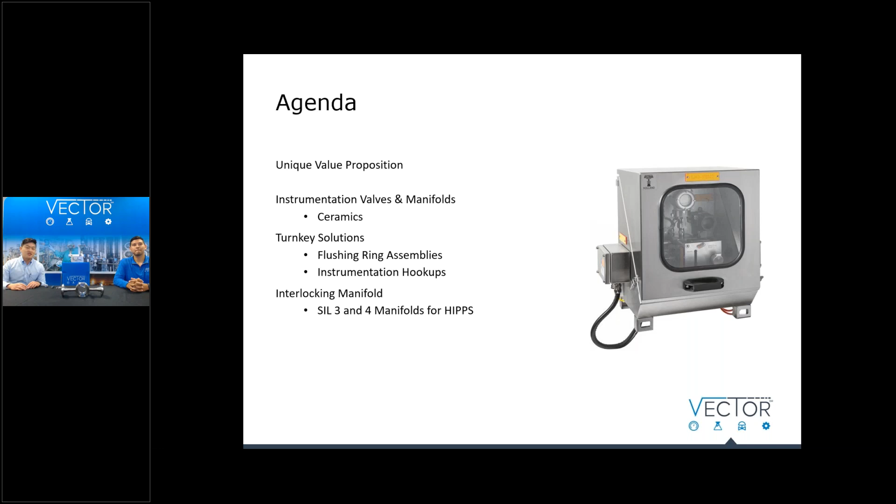We've broken it into a section talking about how instrumentation manifolds have been able to solve challenges, but also turnkey solutions with flushing ring assemblies and instrumentation hookups. And then finally, showing the interlocking manifold, something that we developed 40 years ago that has really been able to solve a challenge, particularly related to SIL-rated systems or high integrity pressure protection systems. So with that, let's get into it.

Astava, really quickly, is a company that was founded in 1956, and we're based in Meppel, Holland, about an hour and a half east of Amsterdam. The company really started with the instrumentation needle valves, and out of customer demand grew into manifolds and instrumentation hookups.

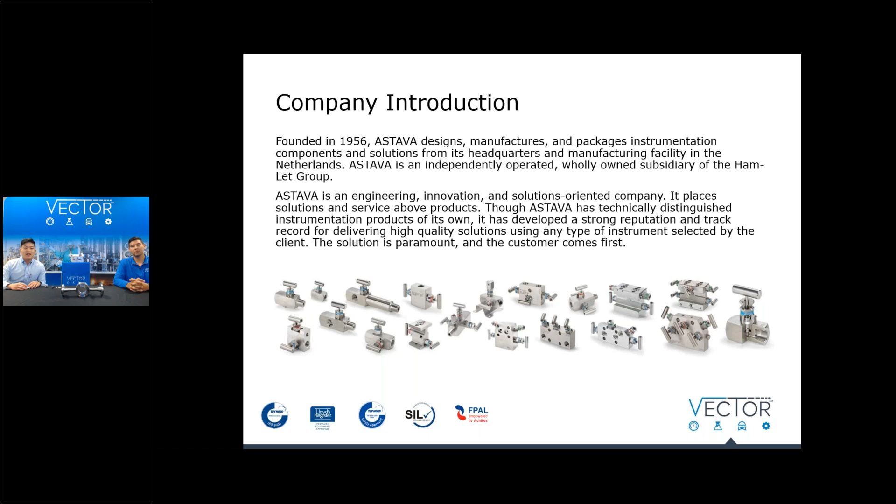Today, we really focus on solutions, and we're really focused on solving challenges for the customer. There is a component of our business that produces standard products, but we also have an affinity, a bent for providing customized solutions as well. Hopefully we can show you some of the creative things we've done for our customers today.

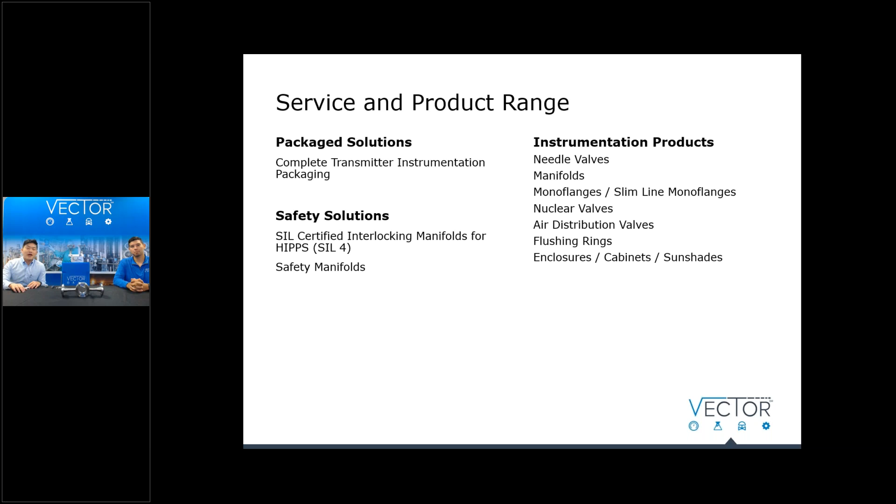Our service and product range is broken into 3 sections. You've got your traditional business of instrumentation valves and manifolds, package solutions, and safety related. The first we'll talk about is instrumentation manifolds.

Really lead this off with 2 images, because these are the 2 main portions of solving a challenge. 40 years ago in the North Sea, Shell asked us to develop a solution for them. The first problem they were having was they were experiencing failure or a lack of reliability in their instrumentation needle valves.

There was a gas application, and so they were choosing soft-seated needle valves to provide a reliable bubble-tight seal. The challenge when you are looking at instrumentation manifolds or needle valves is that when you choose a hard seat, you get greater durability and reliability of that valve, but traditionally have always selected a soft seat to make sure there's a bubble tight seal.

So when they asked us to find a solution for them, we started playing around with different materials, and we came to the market and to the customer with a solution of using ceramic tips in our manifolds. What we found was that there are an array of benefits of using ceramic, none less than the fact that it both provides a bubble tight seal and the durability of a hard seat valve.

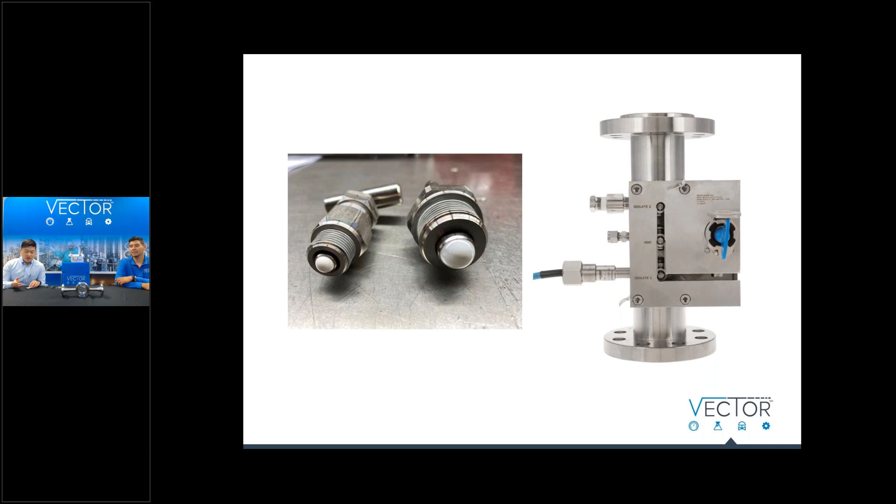The second part really had to do with providing instrument reliability, and the key word here is availability when it comes to the interlocking manifold. We'll talk about that specifically towards the end, but they needed a way to mechanically ensure that their instruments would be available. So we made these 2 innovations and provided that solution.

What I want to stress in this first part is that when we introduced ceramics into our valves, we found it was such a good solution, we decided to standardize on it. We use an Al2O3 ceramic needle tip, which has excellent chemical compatibility. It's more than 10 times harder than stainless steel, which allows the ceramic to make sure there's a snug and customized fit against the seat every single time you close it without using excessive force.

One question we got when developing this was, ceramics may be good in terms of hardness and chemical compatibility, but it tends to be a hard and brittle substance. What we found is that when you make ceramic into a ball, it is incredibly resilient.

If you're familiar with any of the videos we've put on YouTube, you'll notice one thing we do where it doesn't matter what the alloy is. Mainly we test it against 316 stainless because that's the harder alloy we have, but using the stem tip, we'll make indents and find those marks. If you're interested in seeing that, please look us up on our YouTube channel, or maybe the next time we get to visit, we'll be able to talk about that in detail.

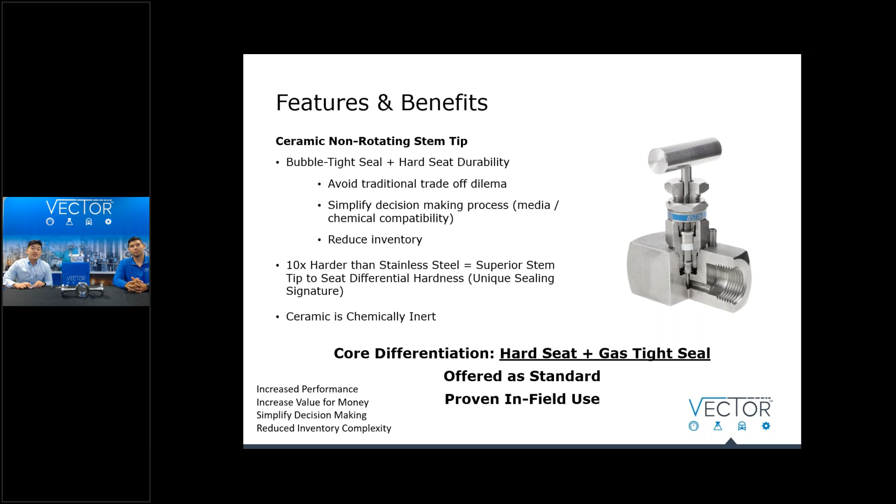I think the main thing to take away here is that Astava's core differentiation is our standardization on ceramics, and that came out of a customer's need to solve a problem, to develop a hard seat durability valve, but with gas tight sealing performance. We've been able to prove this in the oil and gas, petrochemical, and chemical industries for over 40 years now, and we've applied it to our entire product range.

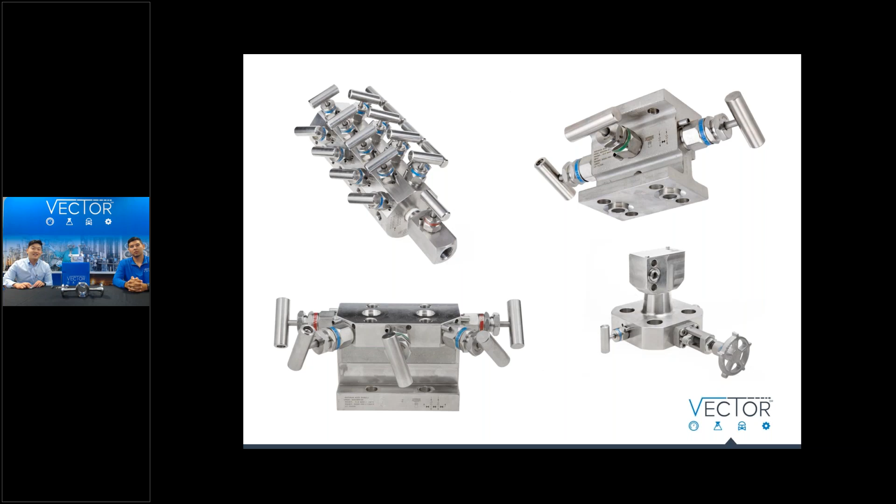You'll find it on monoflanges, 3-valve manifolds, 5-valve manifolds, air distribution manifolds, all kinds. We've really found great use out of the use of ceramics, and hope to talk to you guys more about that, especially if you have any questions about using ceramics in manifolds.

Okay, that takes us to the next section, talking about turnkey solutions, particularly with flushing ring assemblies and instrumentation hookups. Because Devin has been intimately involved in actually developing these solutions with the customer, I've asked him if he would be able to share the story behind some of the solutions we've developed. So Devin, would you take it from here?

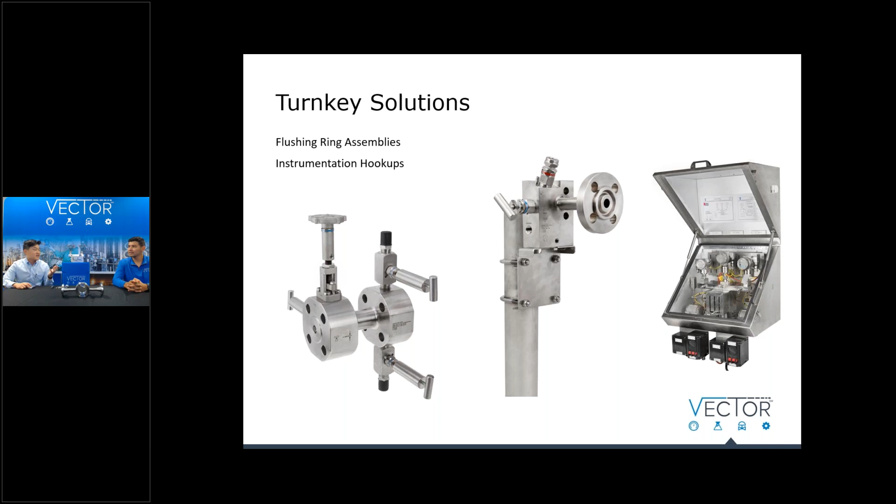Absolutely. Thank you, Caleb. This kind of gets me pumped up to talk about, guys, but something as simple as a flushing ring, as you can see here on your screen, we have 3 different components to it. We have our flushing ring, we have nipples, and we have an accessory on the end of it. This one just so happens to be a valve.

So we had a customer that came to us and said that his plant was moving away from threaded connections anywhere possible. First and foremost, he needed a solution in which we could provide him a flushing ring that had no threads and all welded connections. Second, he was telling us that it was a bit more difficult and time consuming to find this kind of solution because he had to reach out to different manufacturers or distributors to piece all of this together and then do all of the welding in-house.

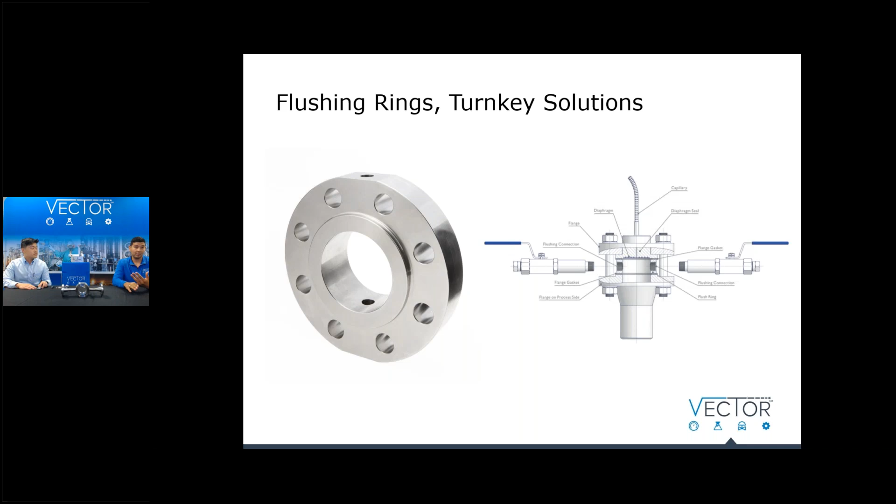So we came to Vector and we partnered with Astava and were able to provide a full turnkey solution in which we welded the flushing ring, the nipples, and the valves to the end of it. This specifically looked like the picture you're seeing now, in which he needed flanges on the end of it, not valves. I got ahead of myself there for a second. But this is a rendition of something similar. As you can see, we're able to do all socket welds all along this flushing ring for him.

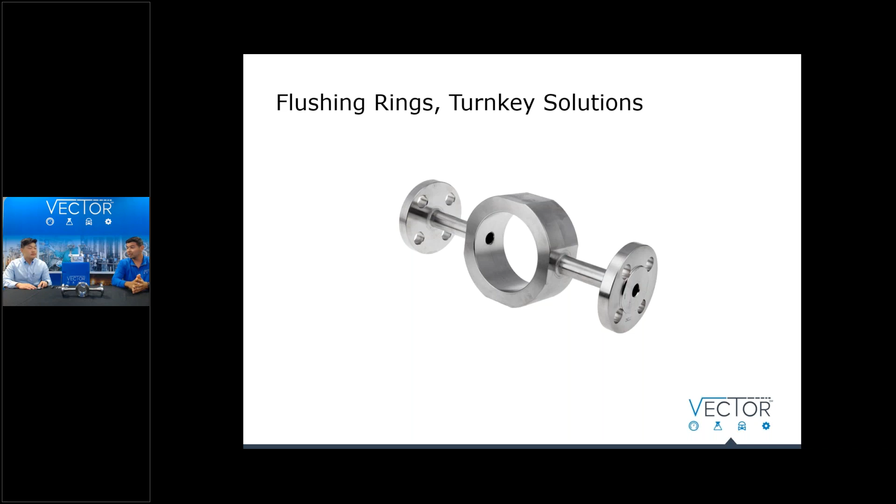We were able to do all kinds of PMI testing, dye penetrant testing, X-ray testing, and we were able to provide a solution. So Caleb, if you move forward, we actually got lucky in which the customer was so satisfied with this. He sent us pictures and was very, very pleased with the way it worked, in which it allowed him to standardize on all of his packages moving forward.

So this was actually in an HF application. So we had to do it—we had to make it out of Hastelloy C, which is very difficult to weld, but nonetheless, we were able to provide him something, and it's still in service to this date. He's continuing to move forward and thanking us for all of the problems that we've relieved him of.

Yeah, cool. It was a fun one for us to be able to find a sweet spot in our skill set and what he needed.

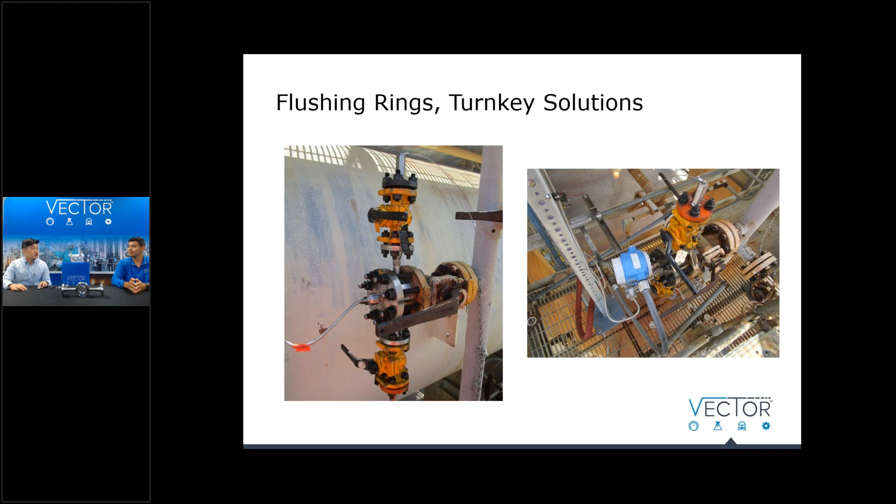Absolutely, and we'll move on to this. Caleb, do you want to share the story about what happened here? Yeah, absolutely. So after we had that opportunity, a different part of the plant heard about what we had been able to achieve for this HF acid application, and so they asked us for a flushing ring, but in a different way of using it.

Basically, it was running off of a coker unit. They had 2 piping spec valves, the primary isolation valve and the secondary isolation valve. The challenge here was that when they blocked in the primary isolation and the secondary, they needed to be able to release pressure that was trapped between the primary and secondary isolation valve. And the practice that they had been employing was calling out a crew of 4 men, and also the fire department, to be able to unbolt a blind flange.

But after we got talking about it and he had seen what we did with the flushing ring, we were wondering whether or not we could sandwich a flushing ring between the primary and secondary isolation valves and then bleed off pressure to atmosphere using instrumentation spec valves. That way the instrumentation group could basically take care of everything on its own.

And so we started sketching on the back of the piece of paper on the back of the truck, and just started looking at what we could offer here.

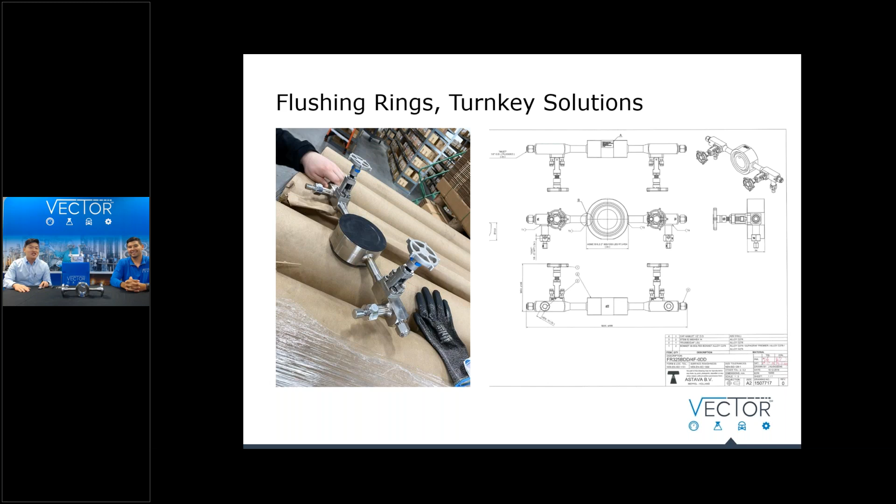Absolutely. And shout out to Max Schiff, really for tying all this together. It has been really fun to work as a team together on this.

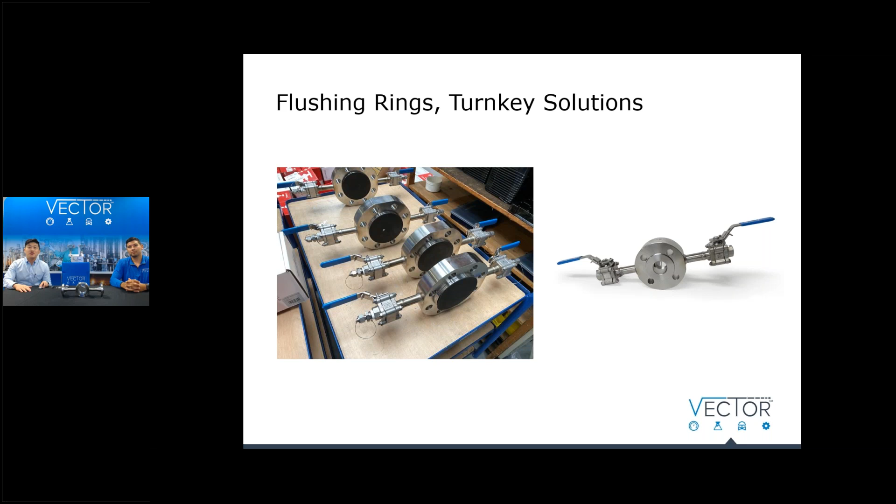Here's just other pictures of flushing ring assemblies, but wanted to show you one with a ball valve coming off of the flushing ring. And finally here, the valves aren't welded on, but you see that a monoflange, which is like a block, in this case a block bleed monoflange, is integrated together with the flushing ring. It gives more options, fewer connection points, something this particular customer in Europe was looking for in this configuration. But it's something we're highly accustomed to doing, and we love finding solutions.

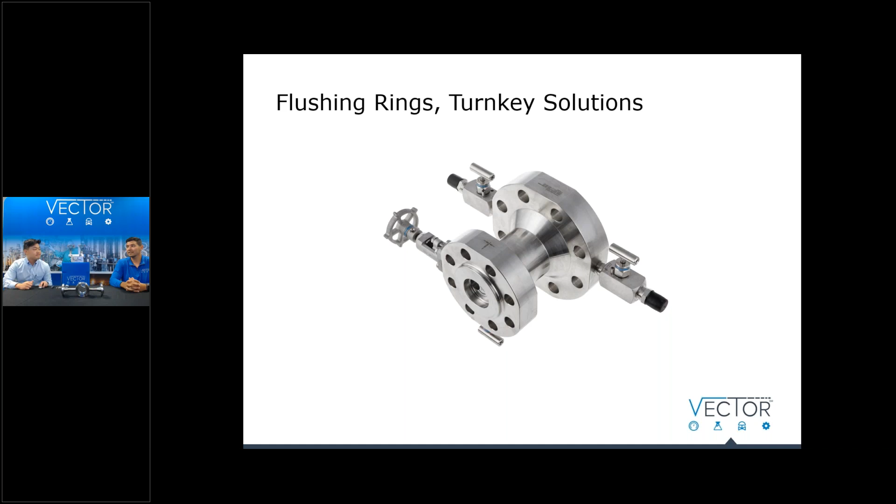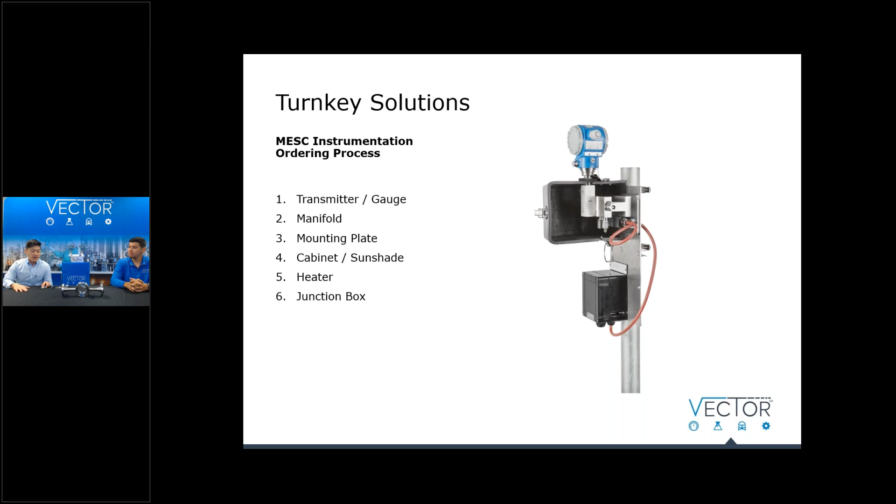So this next one, Devin was also very close in on, and the solution is in that picture right there, but let me run through it. When we talk about instrumentation package solutions, especially remote mounted, this is a MESC ordering process from Shell. It's a 6-step process to selecting all the components you need in a remote mounted system. We really followed this template to find a solution for the customer. So would you talk a little bit more about this one in particular?

He was losing so much time in his process, which was costing him money in the downfall. So he was asking us, is there anything you can do to help us solidify this process, make it easier for us to manipulate? So we went to the drawing board, and the next day he called me and said the guy had to come in, we had to shut it down, and he had to unwrap everything because the transmitter had failed and we didn't have our primary measuring device.

So our solution is, as Caleb pointed out, is on the right, in which we were able to provide him a plug-and-play solution in which he can still have all of his steam trace wrapped, but there are two compression fittings in the back of the mounting plate in which he can run his process and the steam tracing through.

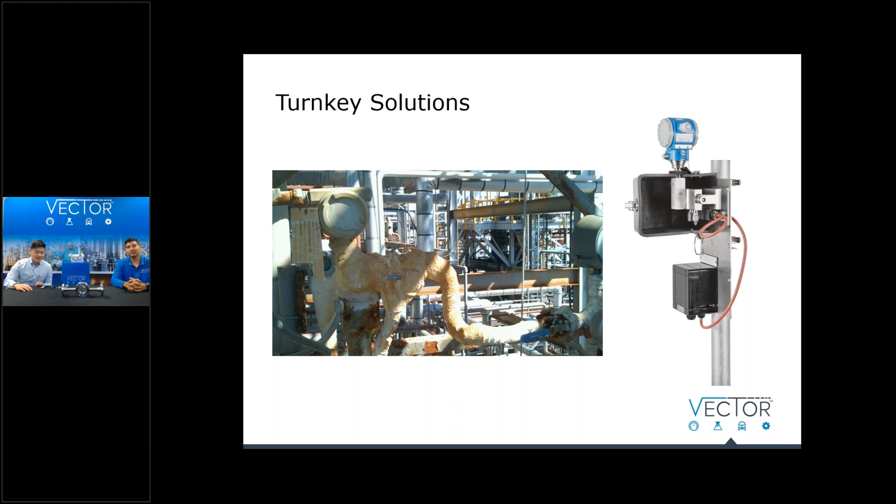So that brings us to the last thing that we wanted to talk about in today's session, which has to do with the interlocking manifold. So maybe some people involved on this webinar are familiar with SIL-rated systems.

And so I kind of want to show you how it works. And so we've got one prepared right here.

So the main thing when we talk about SIL-rated systems is about instrument availability. And so if you work with these systems, you'll be familiar with the fact that a pressure transmitter, the highest SIL rating out of 4, the lowest being 1 and the highest being 4, the highest SIL rating that can ever be attained by a pressure transmitter is a SIL 2 rating.

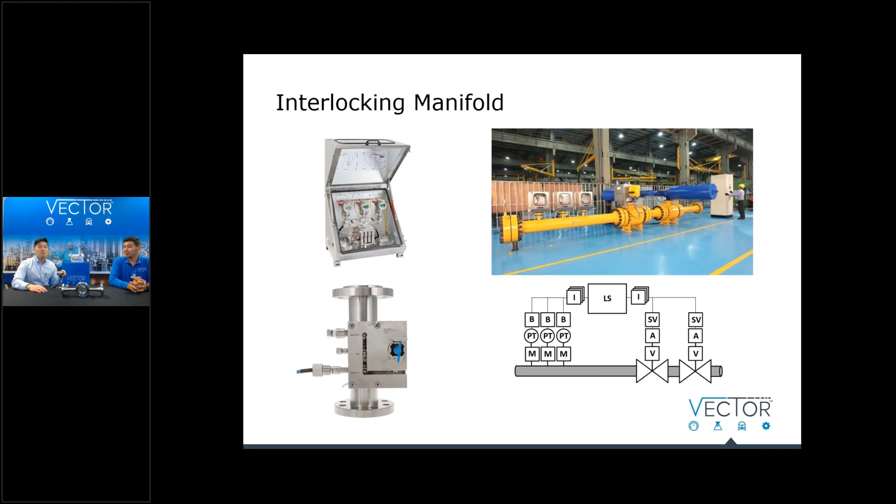In summary, the first thing we talked about was instrumentation valves and manifolds. It's about the use of ceramics to provide a solution, which is to offer the performance of a bubble-tight sealing valve, but at the same time deliver the durability of a hard-seated valve.

And then on the turnkey solutions, as plants move away from threaded connections, we're providing them fully welded assemblies, and we're doing it in a turnkey way that reduces the amount of involvement the end user has to have, in some cases that we've found. And then instrumentation hookups — yeah, it's been really fun doing that with you guys.

Absolutely, looking forward to more coming down the road. And the interlocking manifold is something very unique to us, something we're very proud of, and we hope to work with you on your SIL rated systems in the future.

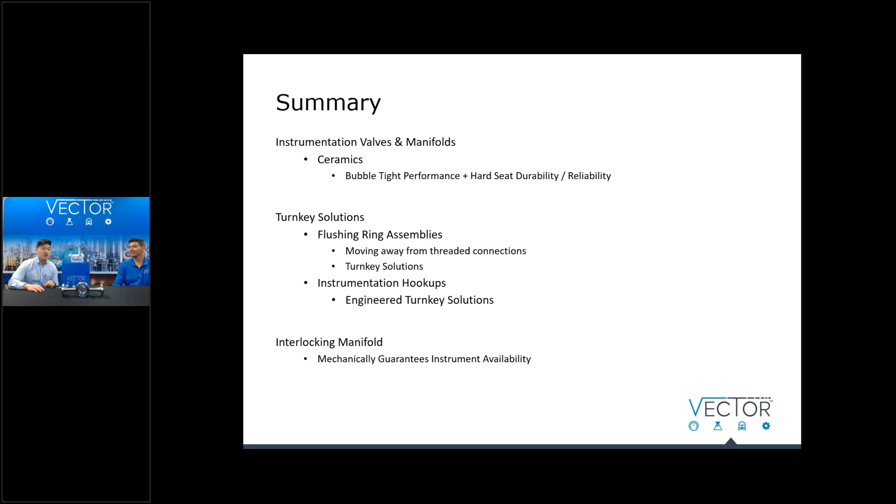We do actually. First question for you: has your manifold been fugitive emissions tested? Yeah, great question. We have seen a rising requirement in fugitive emissions testing, and we're happy to say that...

we are ISO 15848-2 certified. So that is tested with helium and measured in parts per million. We're underneath 50 parts per million, testing using helium as the media, which is more than enough to meet the requirements of almost all applications.

But in addition, there's a Shell test, the SPE 77/312, that's required in some even more critical applications. Shell measures this in cubic centimeters per second, so we can't just translate that number across. So we've done that test, and we've been able to achieve their highest grade for fugitive emissions. Thanks for asking. Great, next question.

What is your standard manifold lead time, and has COVID-19 affected product availability? Yeah, excellent question. Again, our product is made in Holland, but we've been able to get product across.